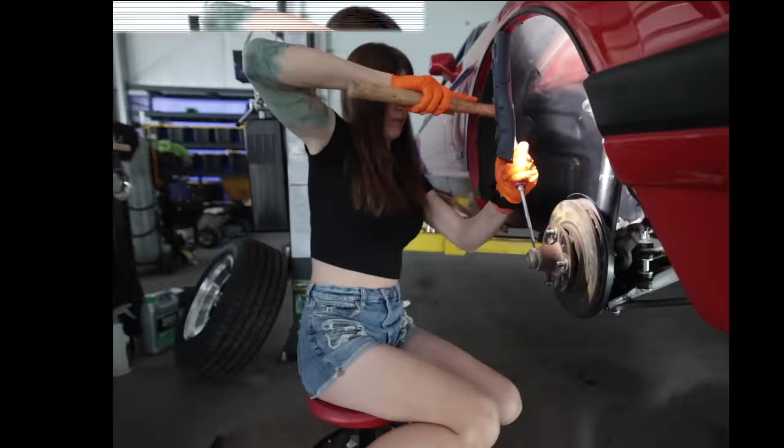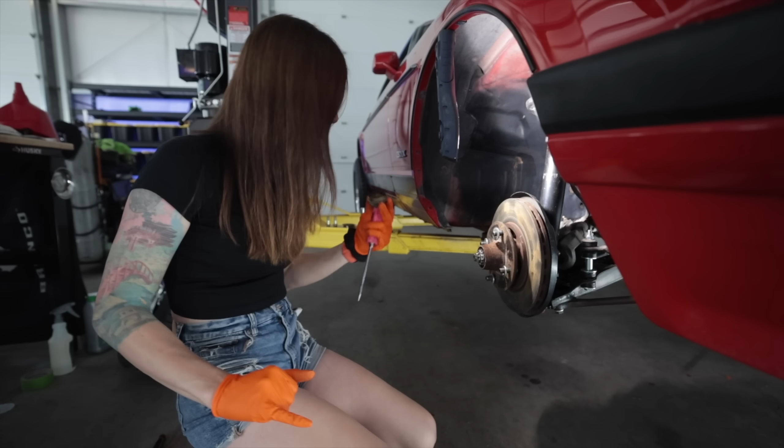Now, the wheel bearings on this car were fine. However, to do what I gotta do means I gotta do them. So, I guess bonus maintenance. It looks like the wheel bearings were just done. That grease is fresh. Smells fresh too. A classic case of smells can be deceiving.

When I pressure washed and scrubbed this area, it looks like a tiny bit of moisture got in there. See how it's got that milky hue to it? That's because a little bit of moisture got inside here. Oh, the bearings still look pretty good though. Oh, this is gross and it's infested with spiders.

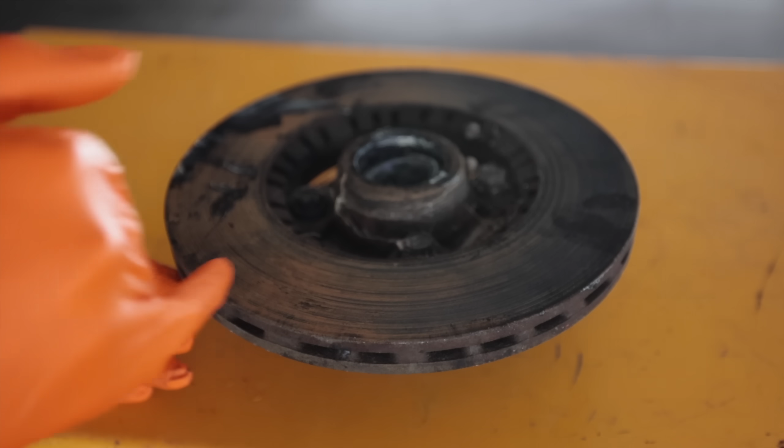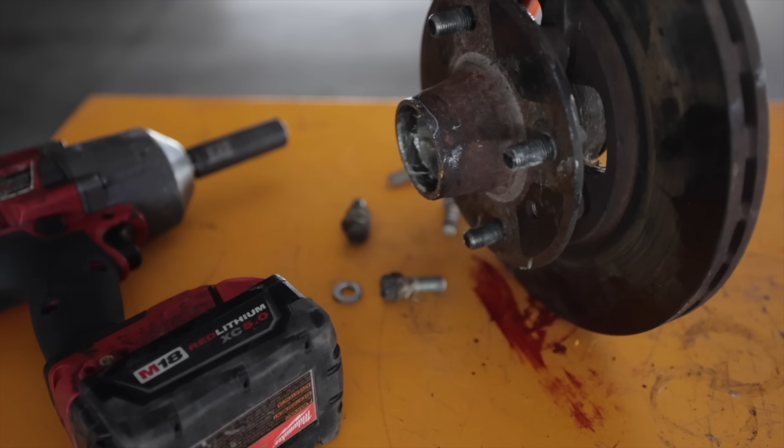If I had a brake sponsor, I probably would have thrown brakes on it just because these look ugly, but I mean, I don't feel a lip at all. It's difficult controlling the urge to try to make everything perfect. Fallout remover. If you recall a couple videos back, I had a little bit of a fitment calibration adjustment I wanted to do for the front wheels, which requires this.

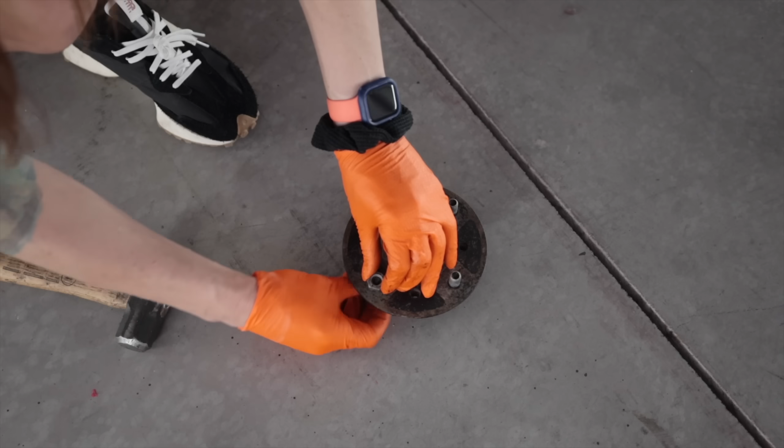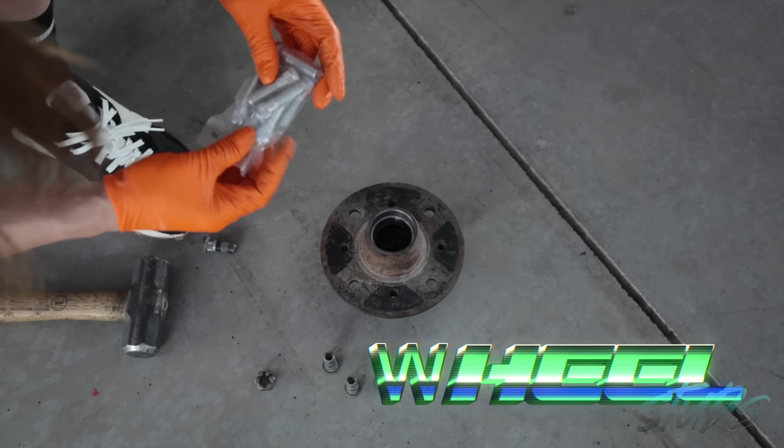Hey, that went way easier than I thought it would. These are just short little guys compared to the rear. They actually have longer wheel studs in the back of the car. I don't know why they did that. Now this right here is a set of substantially longer wheel studs. Not long enough though where I will have to run an open-ended lug nut.

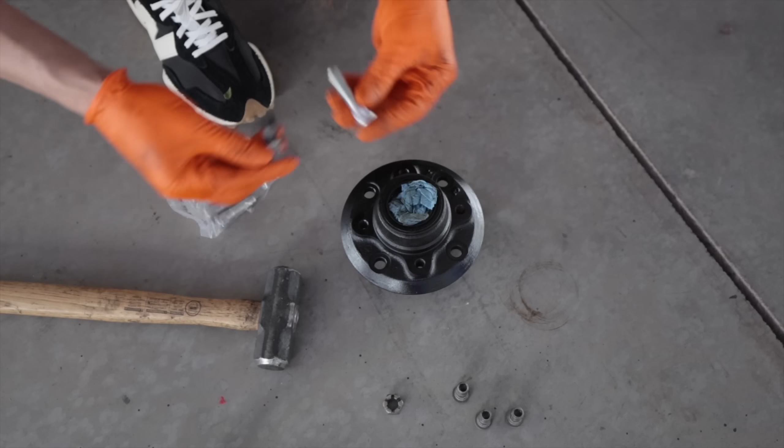Let's give this a quick little scuff. I mean, if you're gonna take the time to disassemble something this far, you might as well at least try to make it look better than when you took it apart. Magic. It's all fresh and black again. I don't know how that happened. I don't know why, I just feel dirty using something out of a rattle can.

Since there's still plenty of life left in these rotors, this was well worth it. Just nice, fresh with the longer studs. Little shot of brake caliper paint on there. Set that down while I wait for my grease seal.

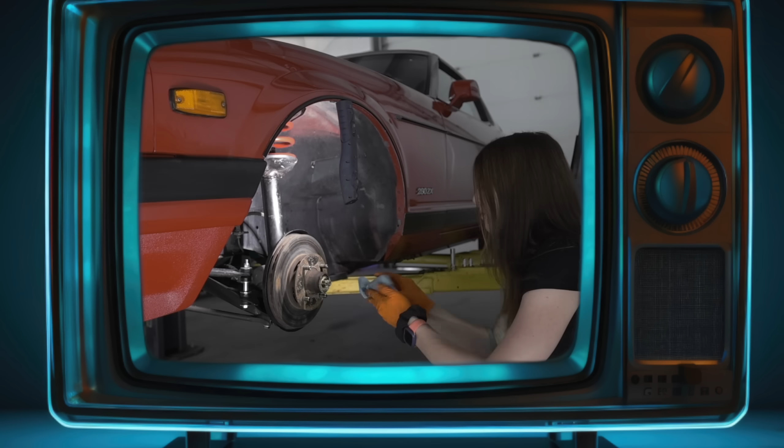There are two types of people in this world. Those of us that have been listening to Black Sabbath and Ozzy non-stop ever since his passing, and those that don't like music. That's sad. R.I.P. Ozzy.

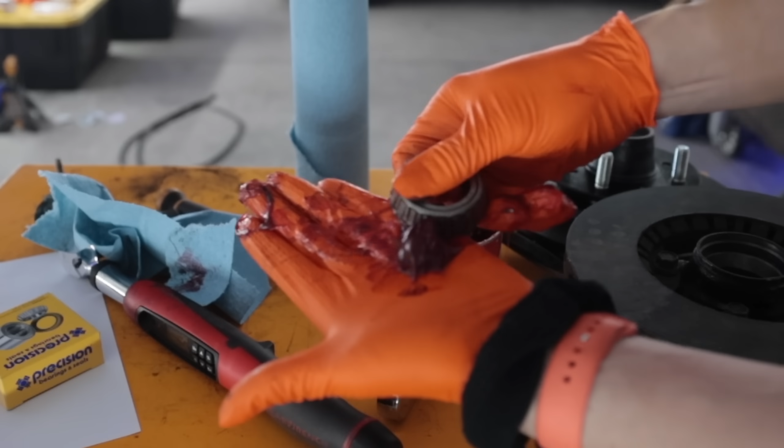Aw man, I got grease on my hair tie. That's fun. This stuff has the consistency of natto slime. A little bit of grease on the shaft. Not an innuendo. Don't get grease all over everything. Now I want to back it off a quarter of a turn. This has been so incredibly hard to film because I keep having to change my gloves and I get grease everywhere and I don't want to touch my camera.

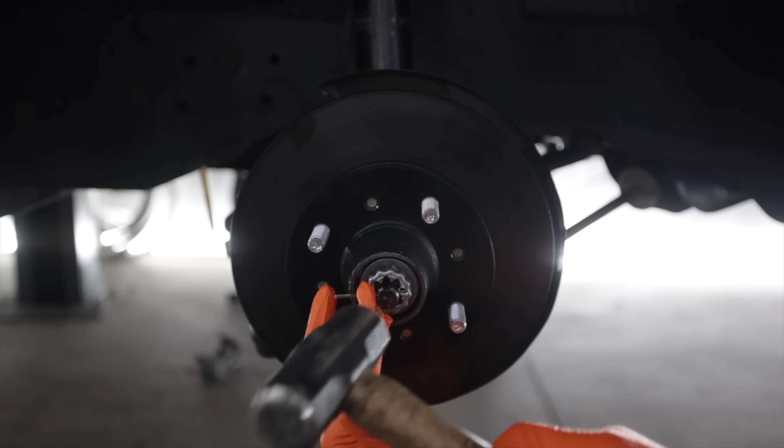I swapped it out to synthetic grease so it should last a lot longer and be better in case water gets in there. This probably hasn't been done in a long time because of the fact that it is not synthetic grease. All right, now that I've thoroughly made a mess of my entire life. I know somebody watching right now is extremely satisfied by how I just trimmed and massaged that cotter pin into place.

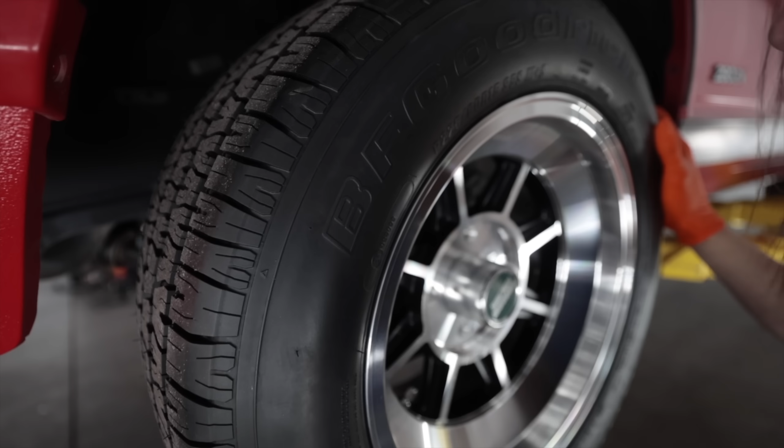5 millimeter spacer. Not a big one. This will really dial in the fitment in the front. Oh yeah, that's better. That's perfect. Plenty of clearance by the inside of the strut. Flush, not ultra flush. The new car.

So it's the following day. Before I get to the meat and potatoes of this video, does anyone else have this problem? Press on your watch, like when you fold your arm, and it tries to call 911 on you.

This is a package from Japan. These are not sponsored. I bought them because I have a habit of doing that for vehicles I own. It's what I like, you know? S130, that I know is the chassis of a 280ZX. Aside from that, I cannot read any of this.

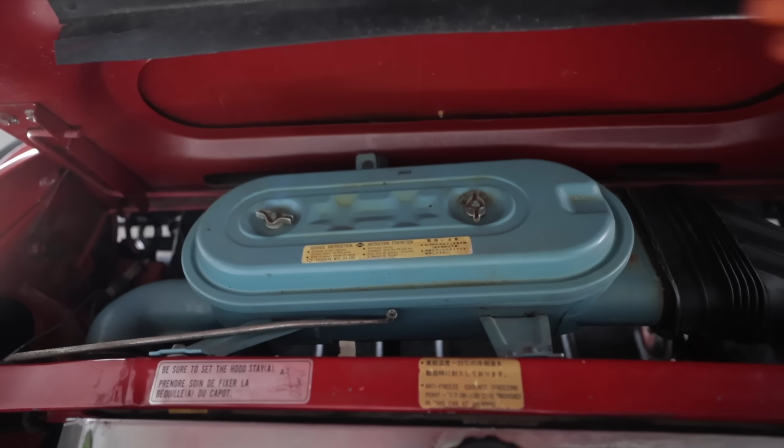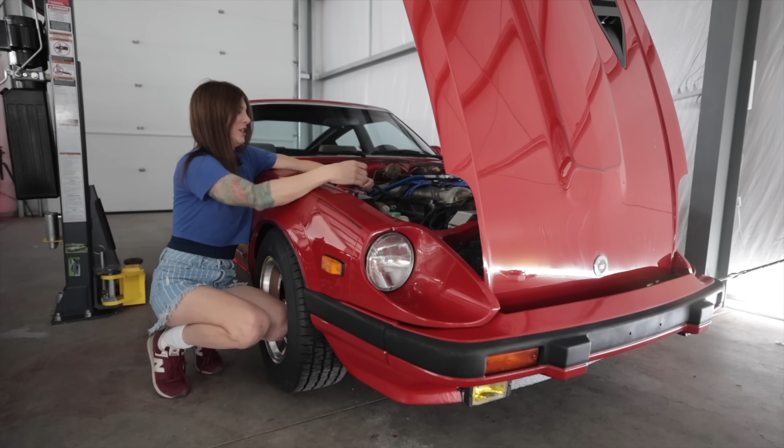It's all about color coordination. The factory airbox is blue. Upgraded 8mm NGK plug wires are blue. The genuine Nissan oil filter is blue. Windshield washer fluid is a bit of a stretch. Okay. Kind of reminds me of the color combo on my MR2 because that's a factory red exterior, blue interior car.

I typically cannot stand color accessories in engine bays. I hate it. But in certain instances, it can be done right. And I don't know why, but I like this. Because normally it's just tacky crap when it's done like that. But when it's done right, it's done right. I don't know.

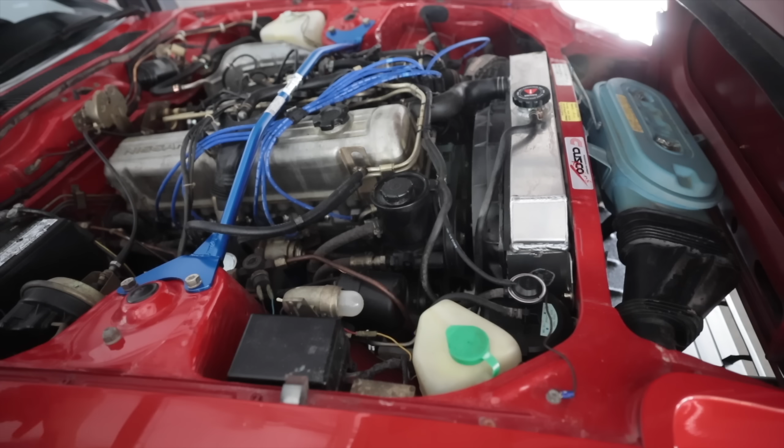I like this. All right, now I gotta dial in a little bit of tension. If it's pushing against, is it still tension or is that post-tension? Da-da-da! Strut tower brace installed. It kind of ties everything together, does it not? That was really lame. Sorry, I left prints on the fender here.

Of course, I'm gonna do the rear. I gotta put the louvers back on this thing. Geez, these are strong struts. Pop these guys off. In case you're wondering, that's a T-top bag. S130. Sick. This will come in super handy on these cars in the rear and dial out some of that sloppy 80s handling.

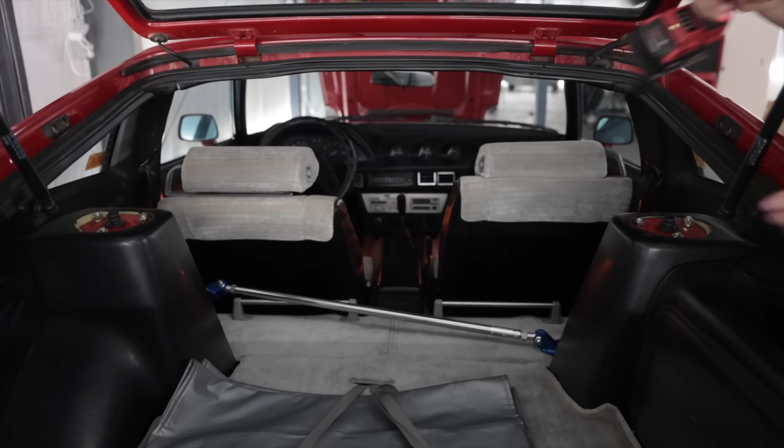Yep, there's gonna be a little bit of custom. So in order to make this work, I have to trim the plastic a little bit. I can still probably make the cap fit on top of it, but I have to trim this. As you can see, it's not in perfect shape. There's a crack in it already.

I'm gonna leave this one up to the decision of the next owner of the car. It comes with it. I can install it or make a template on where exactly to cut to install it. But the whole point of that car is that it was a survivor car and it hasn't been permanently altered. And even though it's a tiny bit of plastic, I'll leave it up to you.

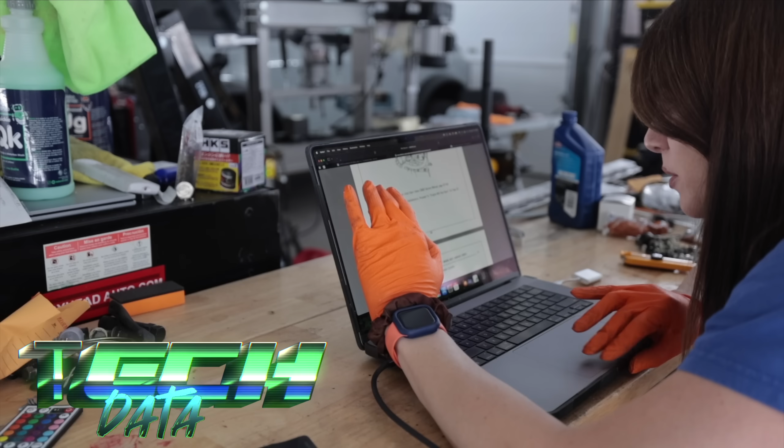Now before I open these guys up, tech data, Datsun 280ZX model S130 series, fuel injection for the Bosch L-Jetronic. I'm gonna skip ahead past some stuff that I know I don't need to bother with. Airflow meter, here we go. This is where I think my first issue might be. There we go. This is what I need to do, test my electrical. Preparation for inspection, I like that.

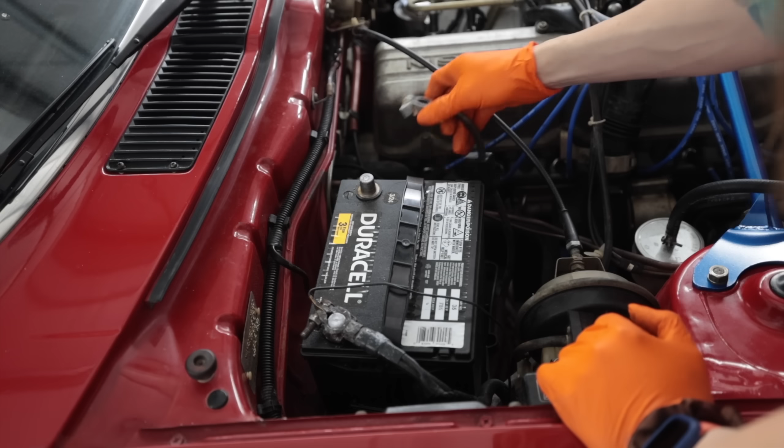Disconnect battery, disconnect that guy. Cable, disconnect lead wire from S terminal of starter motor. Of course the cold start injector pigtail is a fucking nightmare to get your finger in there. I think my ECU is down in this kick panel.

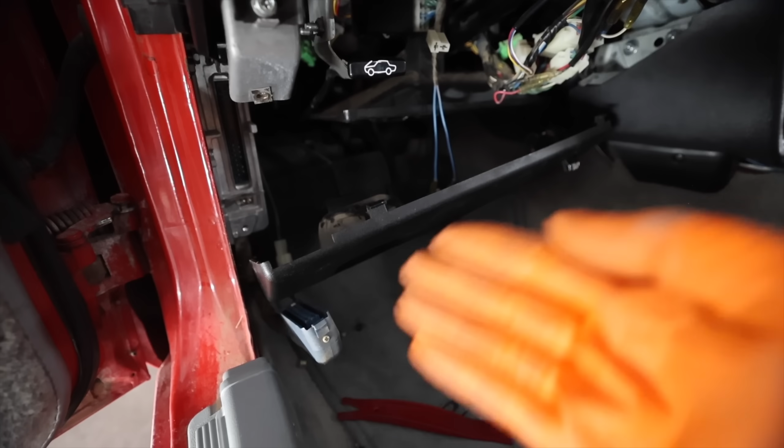I actually like how Nissan did this under the dash. I'll admit, under the dash here, this is a very maintenance-friendly design Nissan came up with to access the engine ECU. Very simple to take apart. I like that. Here is the plug going to the ECU. Careful not to bend this too much because old brittle wires.

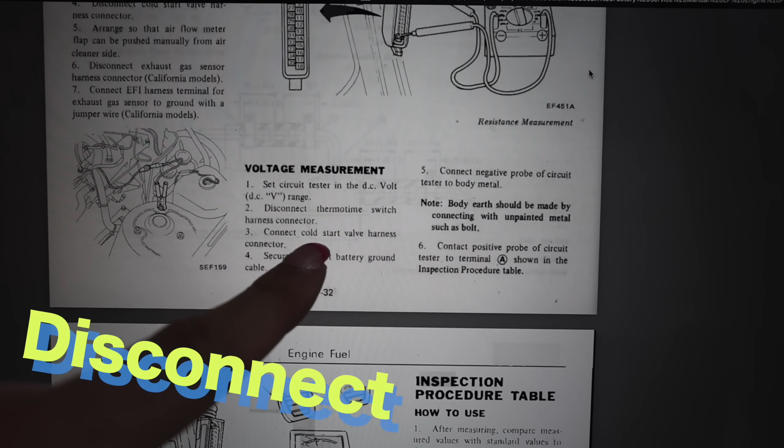Disconnect thermotime switch, which I have a brand new one on there now, which is right here. That's disconnected. Cold start valve connected. Connect battery ground. Oh, there's a table right here. Well, this is a table which I must test now. Oh, there's all kinds of... oh, good. Bring my laptop over here.

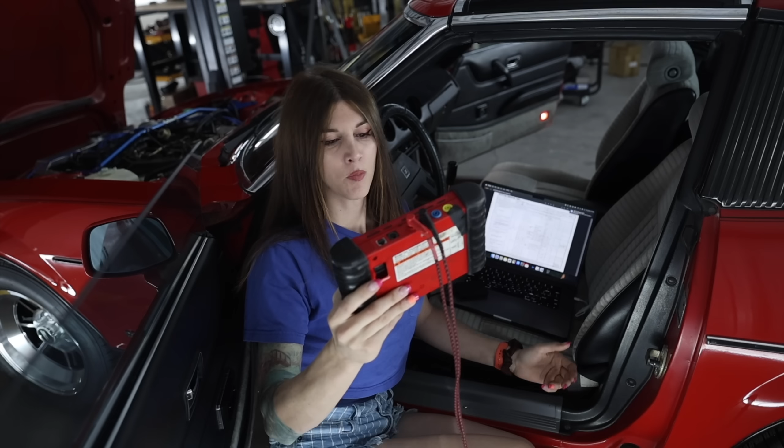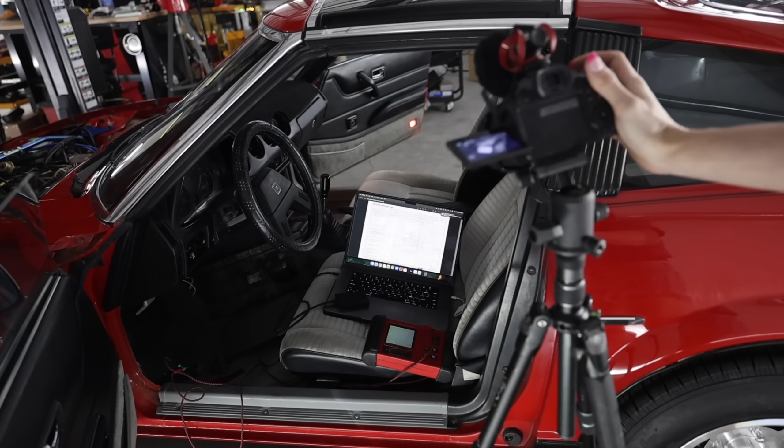Voltmeter. All these beginning tests are resistance, so I got it selected to ohms, 32 and 34. The airflow meter potentiometer. I don't know how I'm gonna do this and see my... I know how I'm gonna do this. I have two cameras. So I need to actuate the flapper on the AFM. That's fully open, and that's fully closed. Oh, my fingernail's stuck. That would have sucked if I broke off my fingernail inside the air intake. What a fucking dumb thing to have happen.

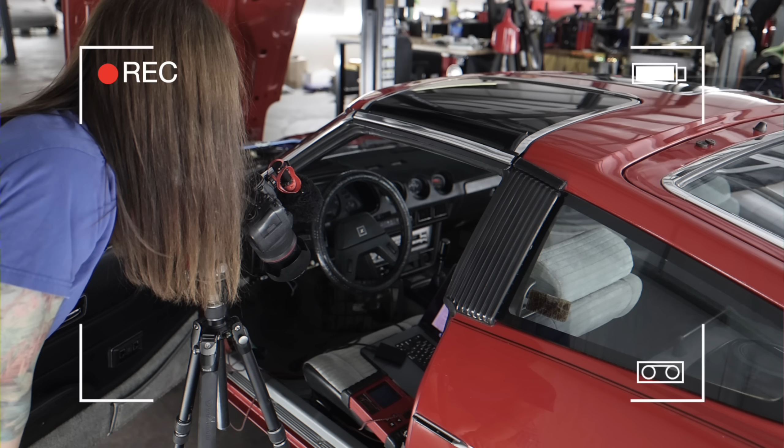So it ranges from 0.069 to about 400. Okay, so this should be 0. I gotta jot this down so I remember. Next test is the throttle valve switch idle contact and circuit. Currently, with my throttle pedal all the way up, I'm at 0.4. It should be 0.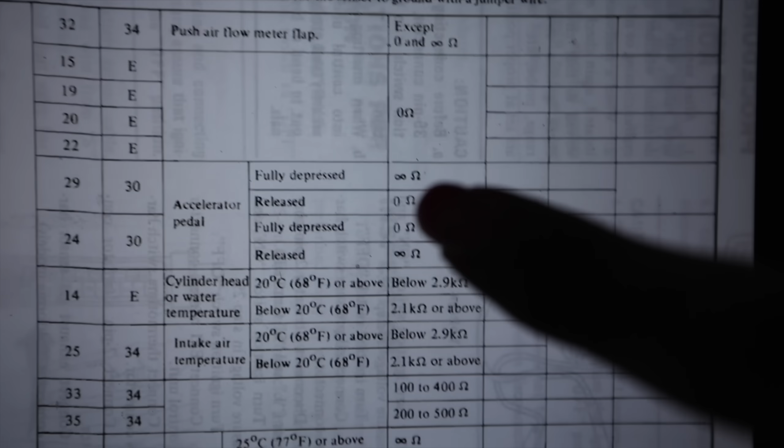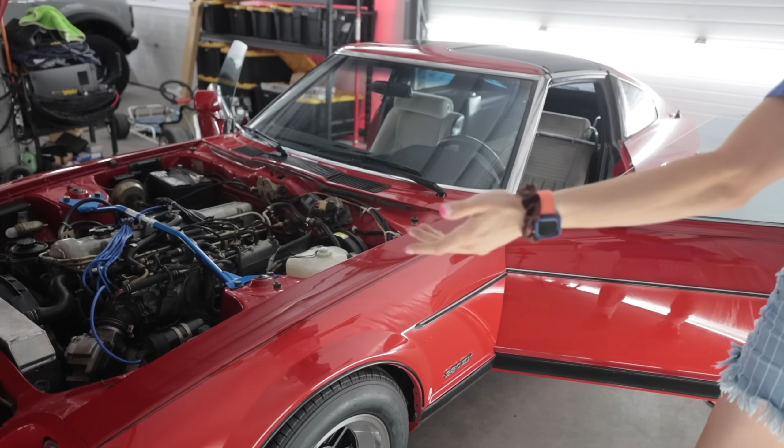Accelerator pedal fully depressed. And then fully pressing it, I should have infinity. That 100% could be the whole problem with the cold start and this thing running like crap. So I have to do the same thing now, but voltage checks, so you get the point. And start. Correct. That's good.

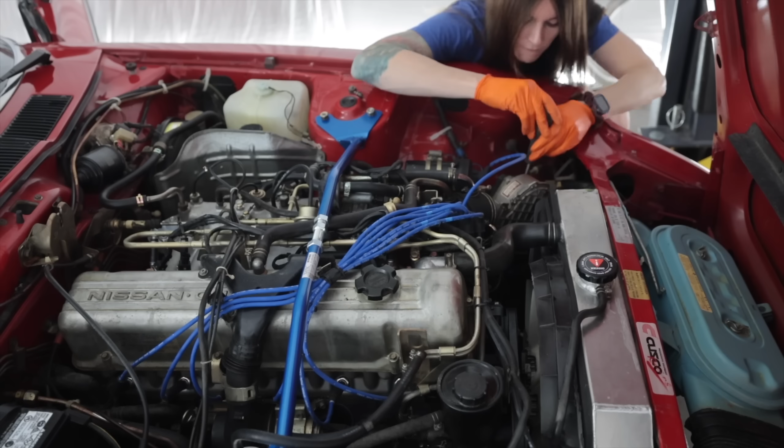Troubleshooting this car is kind of neat because the electronics are so simple. You don't have to have a high level of understanding to figure out how this stuff works. And the tech data is really good. Anyone that's ever troubleshot an EFI car from this era knows that it can be a love-hate relationship. It's great that it's simple, but also it's simple in a way that it's not good when it comes to troubleshooting electronically. It's kind of irritating, but simple, but irritating.

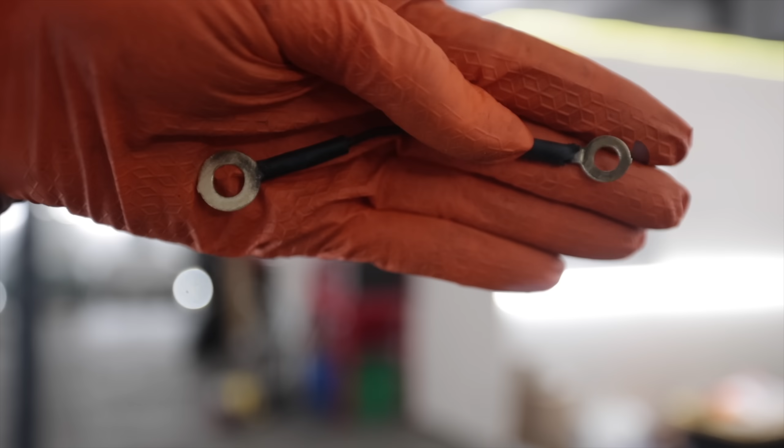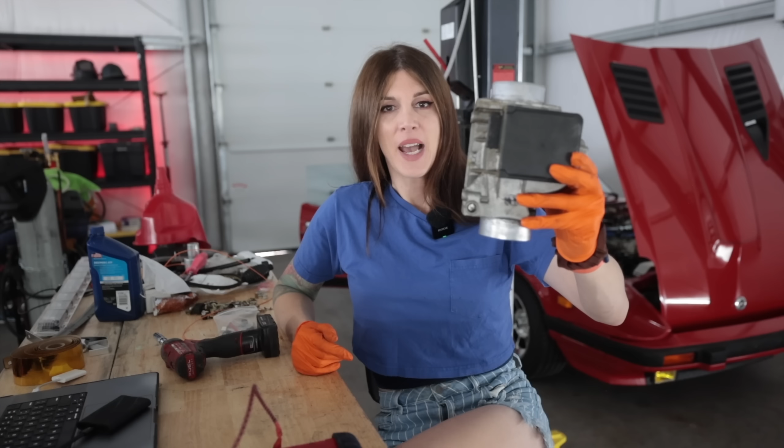There we go. Even though all my grounds tested good, I do have a ground underneath here that needs to be cleaned. Much better. That's interesting. 68 degrees or above, which it is right now, below 2.9 kiloohms. Further analysis. As I previously mentioned, this is an AFM airflow meter. It existed before the mass airflow sensor. That's why it's so huge. This all has to be verified regardless if the potentiometer checked good on those initial checks.

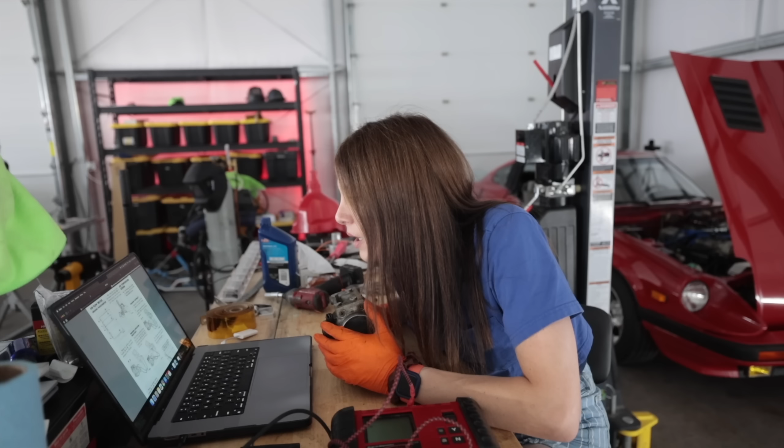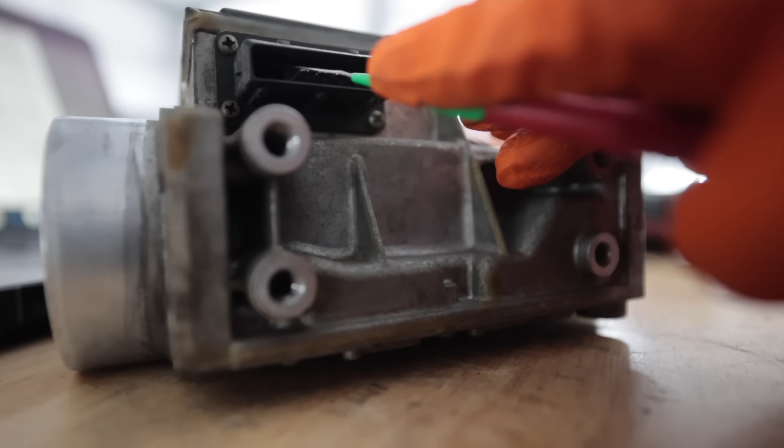What is 33 and 34? Are these labeled? Oh, they are labeled. Oh well. Good. It's currently 81 degrees Fahrenheit inside my shop, at least over there. Wait. Dumb. These temperature readings I did in the car, they might actually be fine. So it's actually dead perfect. As is this temp sensor. I just had the multimeter on 1K instead of 100K.

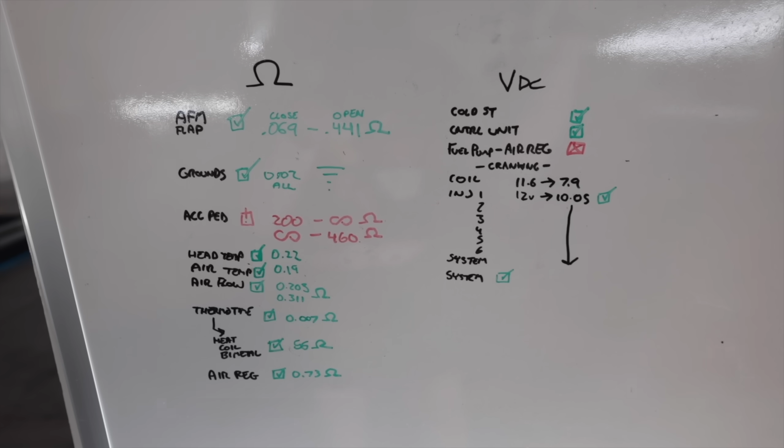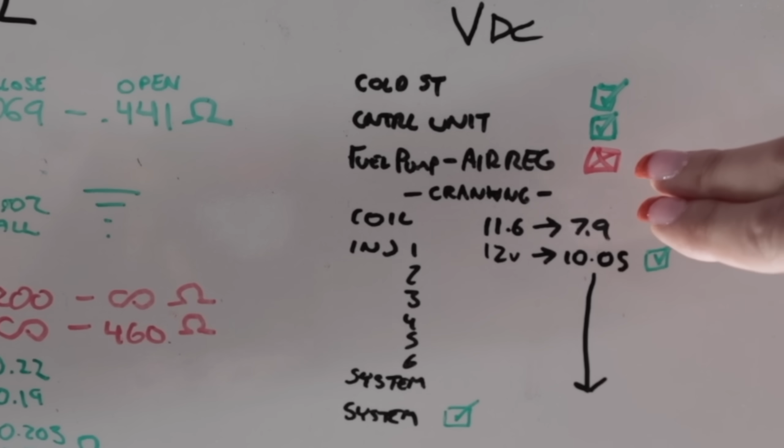The final results are everything is in spec according to the test procedures with the exception of the throttle control and the fuel pump air regulator cranking circuit. There's no volts present there where there should be. However, my fuel pump works and the air regulator tested fine over here. So that one, not sure if that's actually an issue.

It's a couple of days later, which means I'm a couple of days closer to my deadline with this, so I'm starting to stress a little bit.

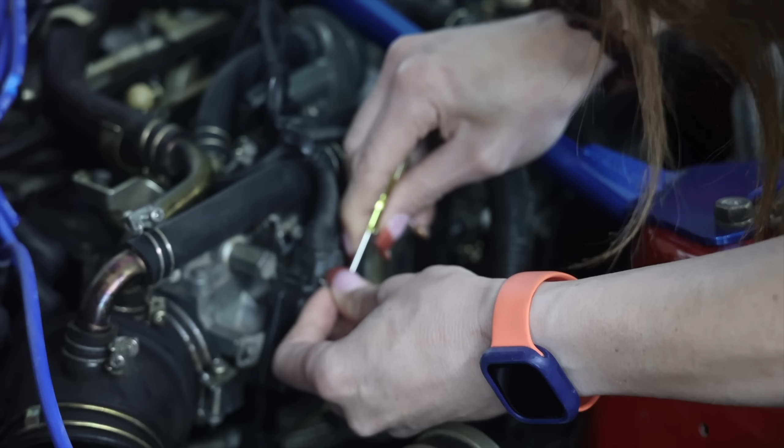So this is adjustable. Please don't break. Take this little clip off. Oh, that has got creepy green death. Immediately right there on that center terminal. See how it's green and the other two are not? You see inside there, it's like a pastel mint green. That might be my issue.

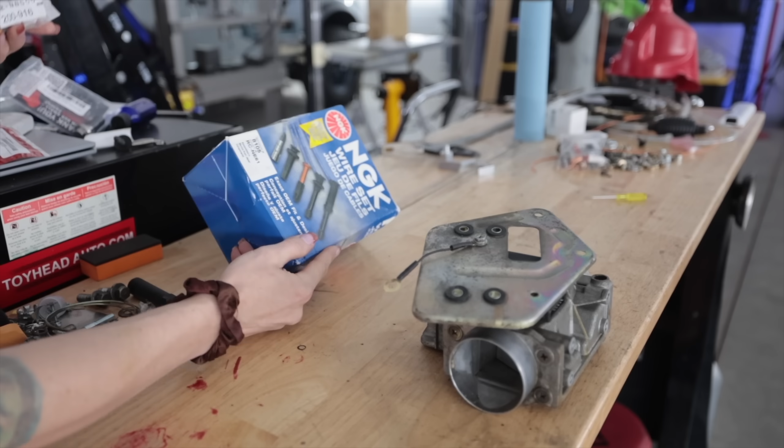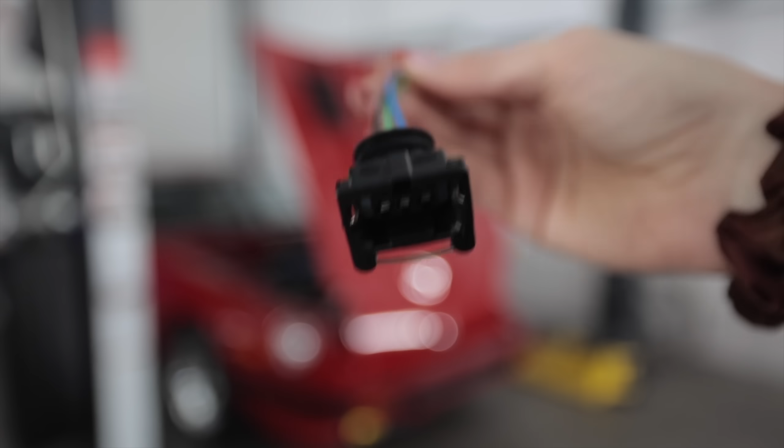I put together a little stockpile of additional parts for this car. Not that plug wires go out often, but I got an extra set of plug wires. There's some genuine Nissan injector cups, OEM Nissan coolant neck gaskets. Luckily, I thought of that. I have a brand new pigtail, free of creepy green death. Since I replaced all the wiring going to the injectors, I just thought it made sense to order this one too. Cut away from you. Yeah, that was disgusting. Hopefully it's not too far. Yeah, the copper is clean, so I didn't have to go that far.

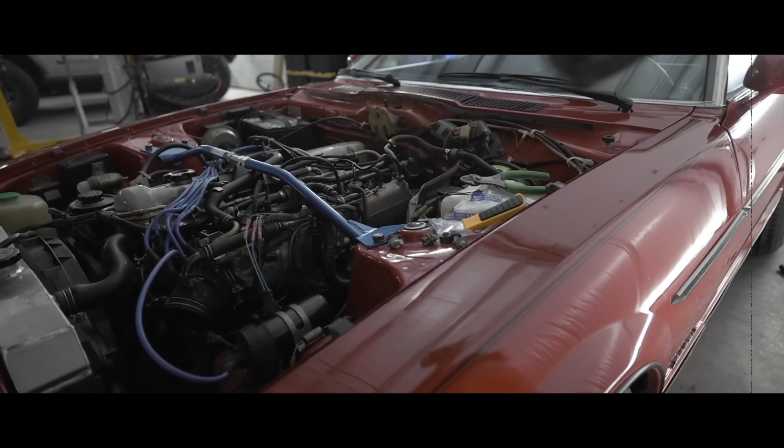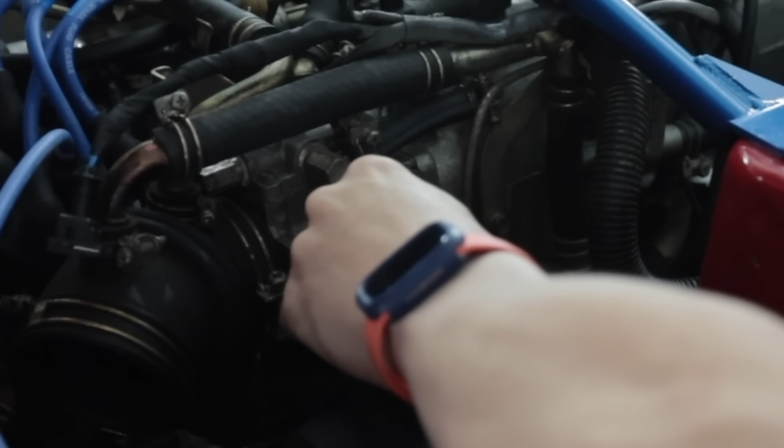I don't think I have a screwdriver small enough for this. This is the smallest set I have, but I don't think they're long enough. Basically got to perform rocket surgery here. I don't know what the hell's even in that hole. You know what a screwdriver doesn't work on? Rivets. There's a fun fact for you. Screwdrivers do not turn rivets. And those are rivets. I could buy a new one of these, but I do like the challenge of seeing if I can get this thing to clean up and calibrate.

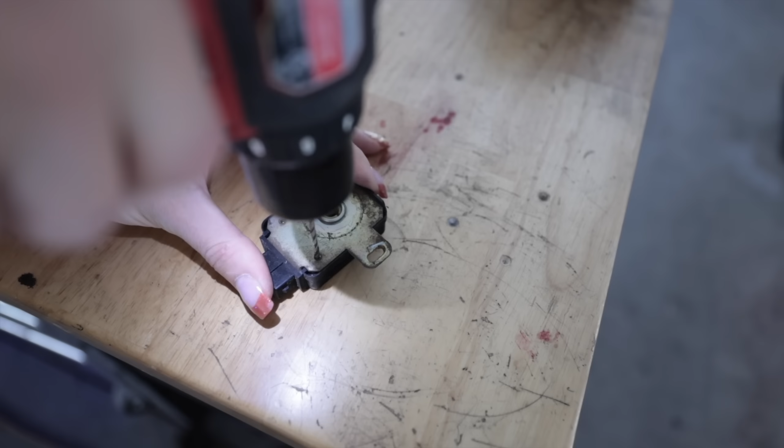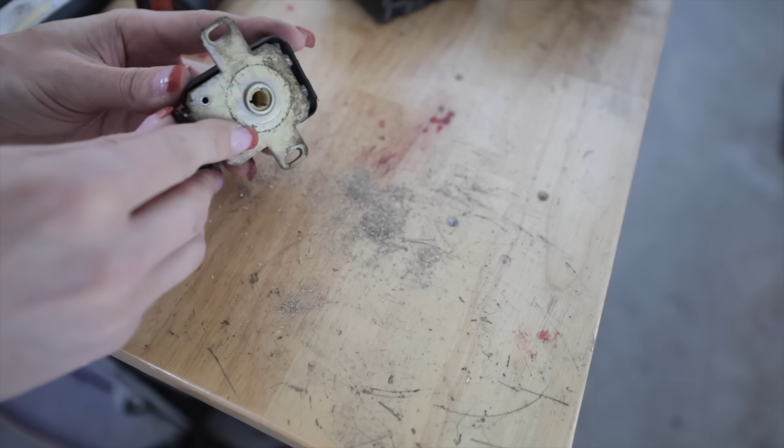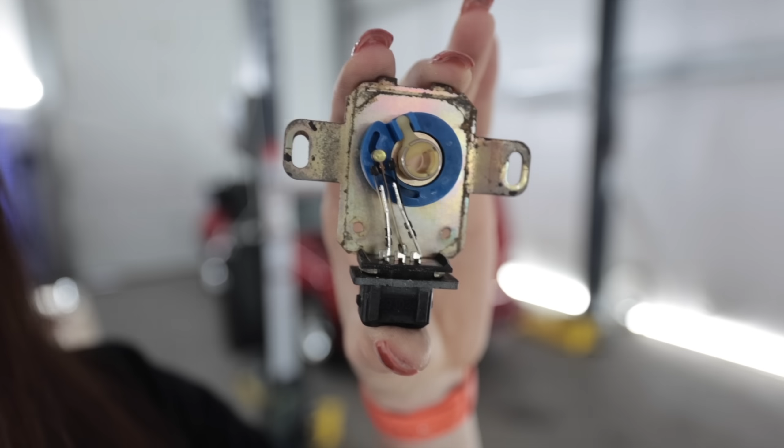Heat up this plastic so I don't crack it. And that's the inside of the throttle position sensor. So you can see the inside, these little copper strips, they are kind of dark and dingy, but there's no creepy green death on them. If I had to guess, that center one is the 12 volts and then it's varying the ground on the sides or vice versa. I wish I could get a pencil eraser in here. They work great for cleaning off copper.

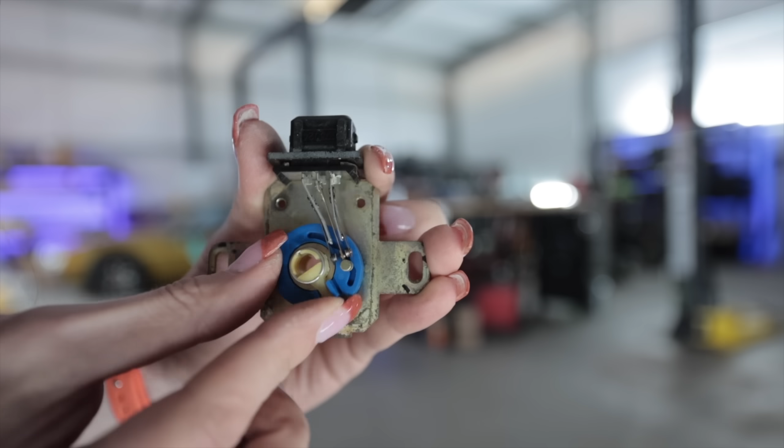So you can see when this rotates, the little inner pendulum makes contact with these pads. Well, the pads had a bunch of black corrosion on them. So I cleaned them up with sandpaper, as well as the little contacts in here. I'm gonna install it without the cover first. Try to get it as close to where it was as possible. I should, in theory, be able to just do this test again without the car running and see.

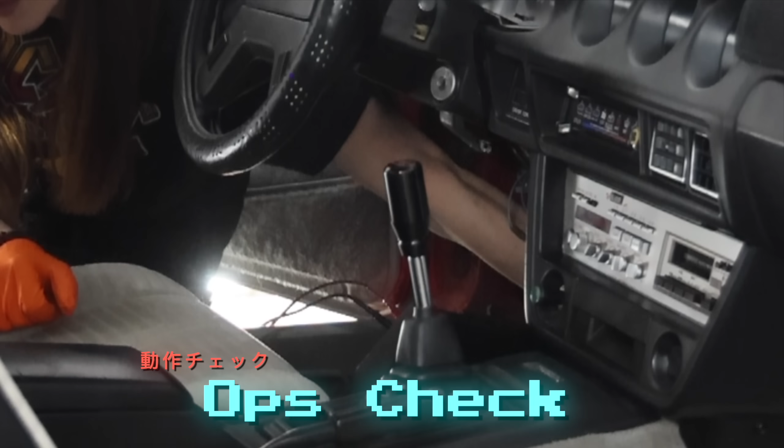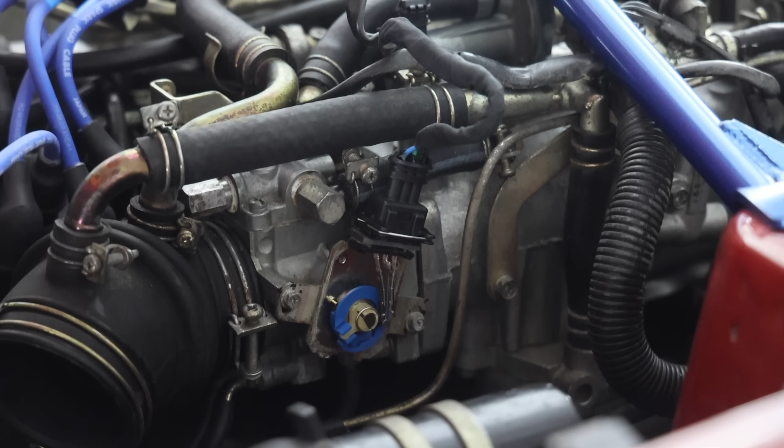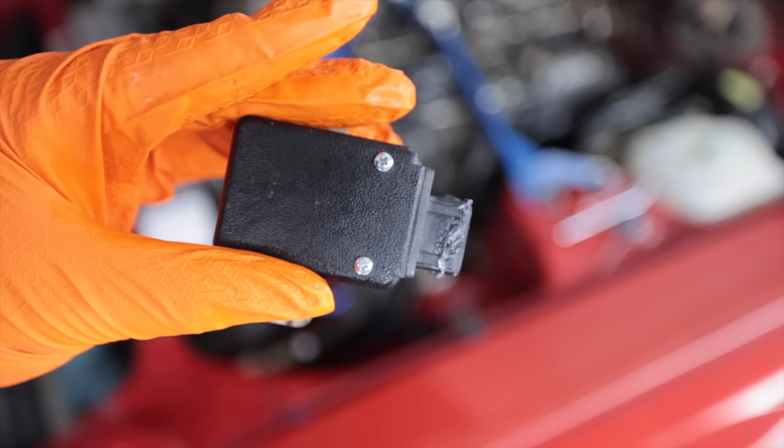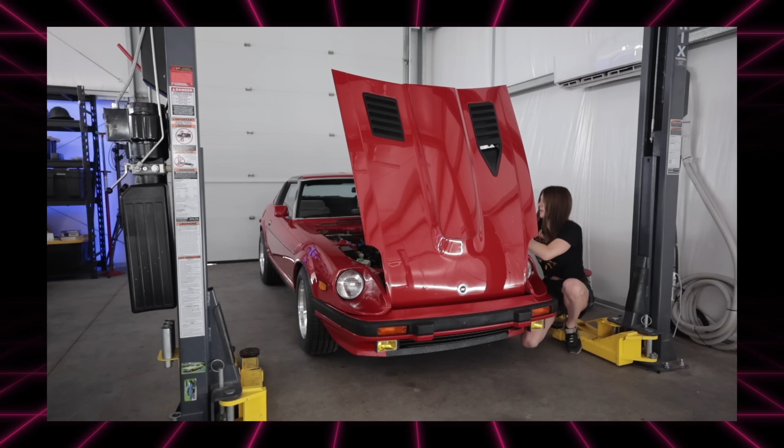Let's drop the AFM back in. Plug on. Okay. Now the only thing left is that air regulator. And I don't even know if that's wrong because the potentiometer reading was good. Back this thing up a little bit. Also, there's no guarantee that this thing's gonna idle perfectly just from fixing that, because there might be a secondary issue I haven't discovered yet.

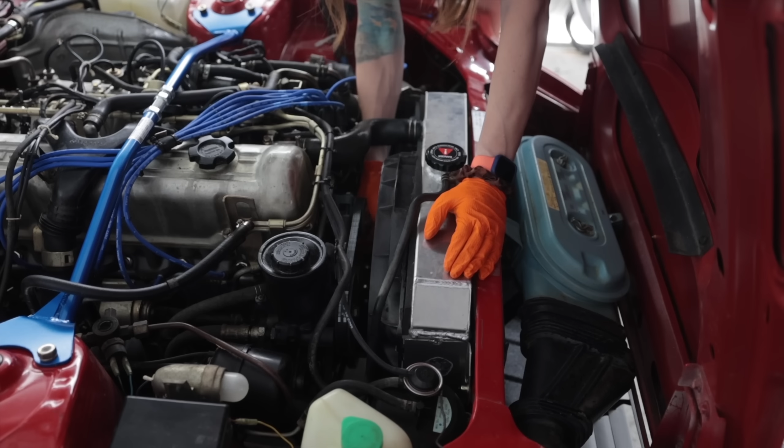So two things, the throttle position sensor has a big range of adjustment to it, and that is key to allowing this thing to be able to idle. I need to recalibrate and adjust that. And secondly, I gotta tighten the belts. Yeah, that's pretty loose. That should be good right there.

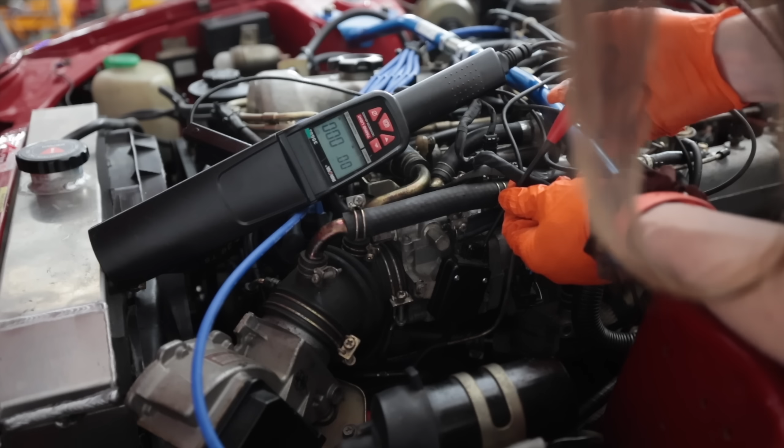In order for me to calibrate the throttle position sensor, I need to know what the engine RPM is, and I can't sit inside the car at the same time. So hopefully this works, or else I'm gonna need a second person. Oh, it's gonna thunderstorm out there. So I need to be able to grab the terminal. So I shouldn't have continuity right now as it sits. And then at 1400 RPM, it needs to start to open.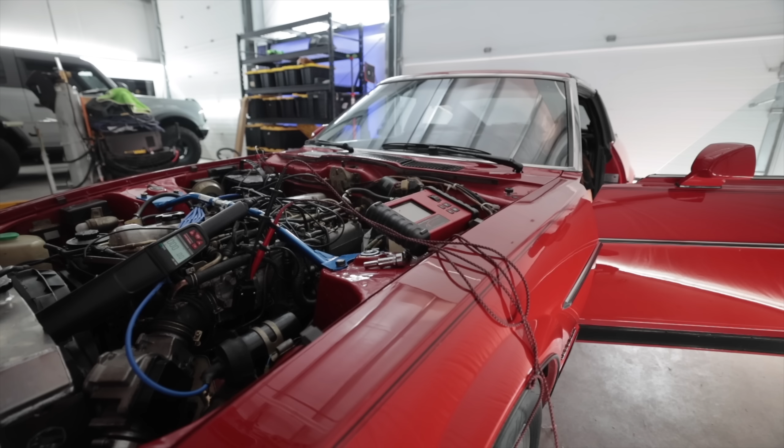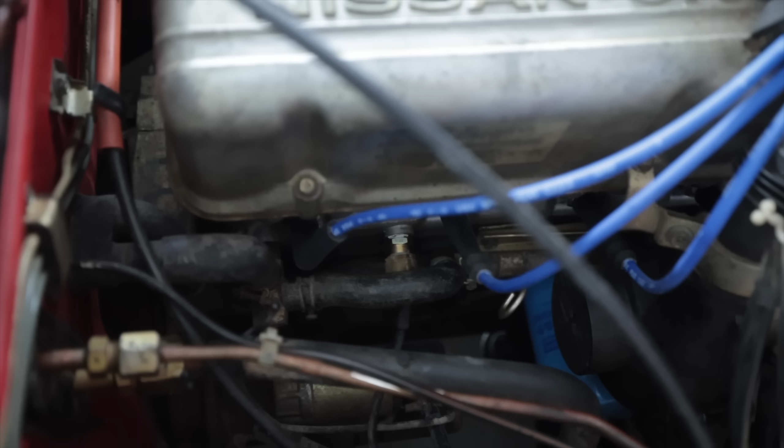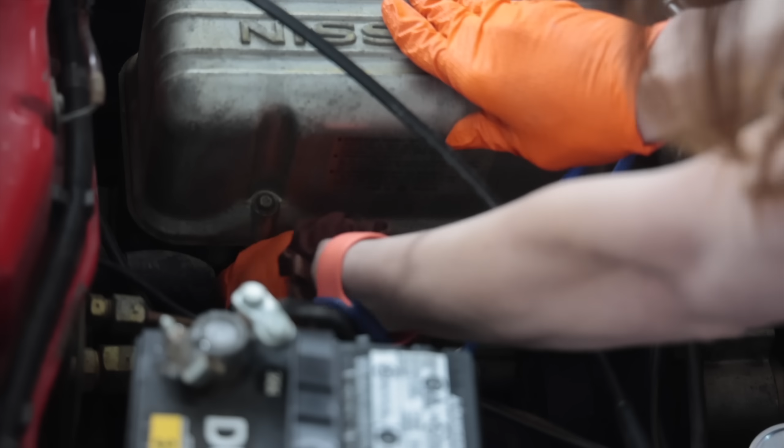Now that that's set, I have to check these plugs because I let it run so long with super rich conditions that even though these are brand new, they might actually be fouled. They're pretty black, not terrible, but I'll clean them up. Number 3, pretty much the same amount of carbon as the other 3 had. I really hope this is it. You have no idea how stressed out I am right now. Hey! Yes! Hell yeah!

Don't worry about the fact that there was also a massive vacuum leak that I had to fix, and I was just sick of working on this thing, so I didn't film it, but I took care of it and now it's fixed. Oh, that sounds sick now. Nice idle, good. Oh, it smells good back here. It does not stink like rich fuel mixture. Yep, that's running great now.

Oh, that's good, that's good. I don't want to get it hot and stinky in the garage. I would say that's a massive improvement, especially when the engine's warmed up. I mean, it is so snappy on the revs.